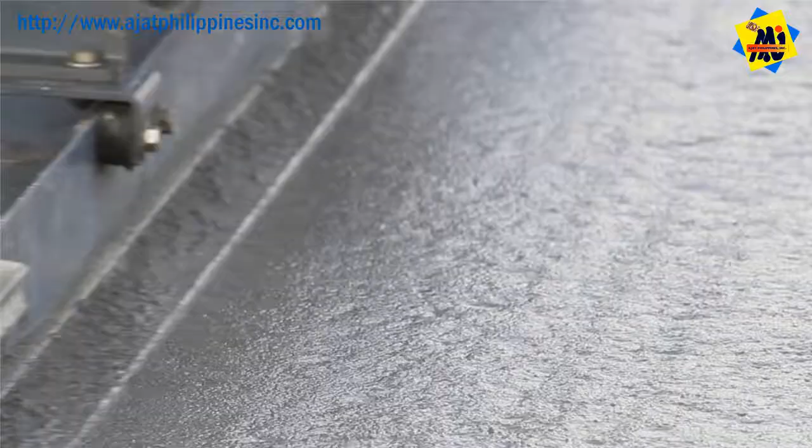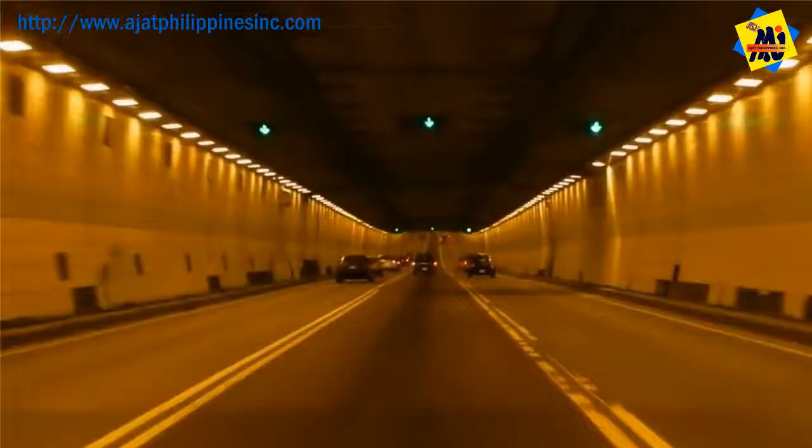Concrete is the primary building component of our developed world. With it, the human race has built buildings, cities, bridges, ports, marine walls and piers, caisson infrastructure, tunnels, sewers, dams, highways and roads, rail transport, and the very homes we all live in. Concrete is made from sand, aggregate, cement, and water.

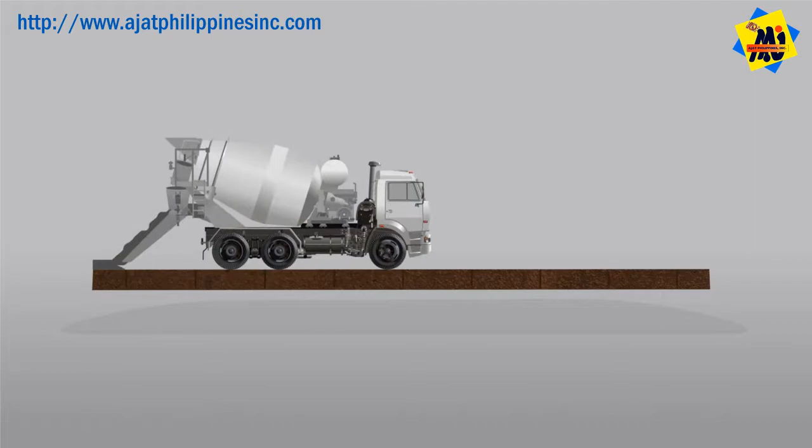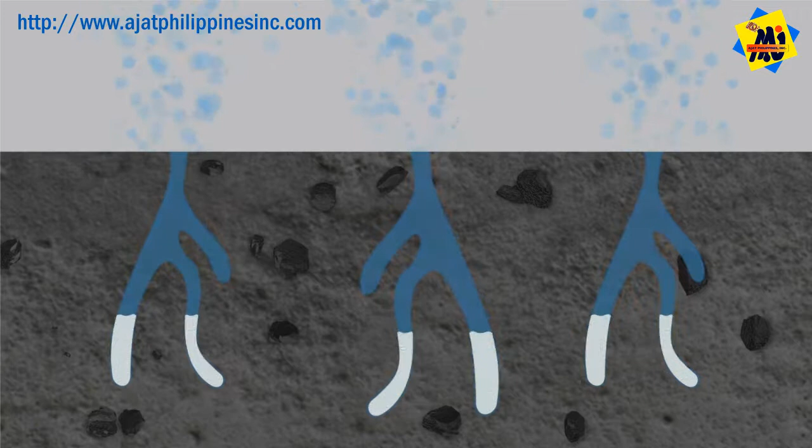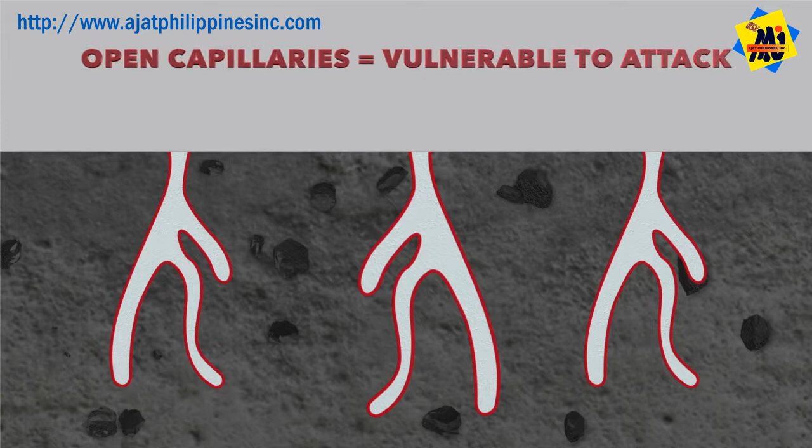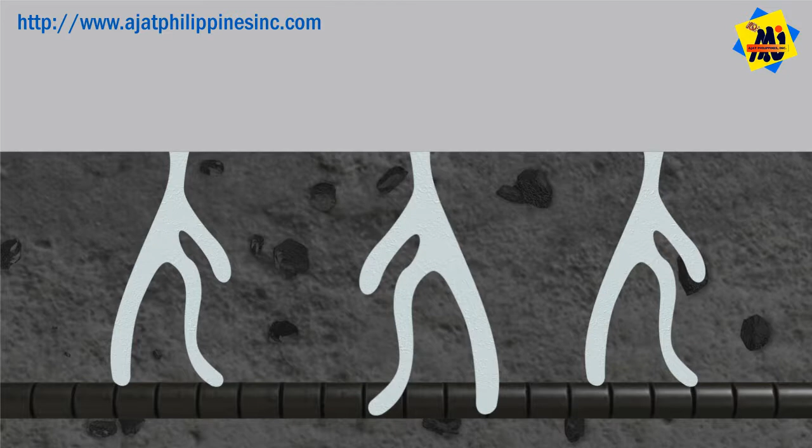When placed or cast in its mixed form, bleed water in concrete escapes into the air, creating capillaries. These microscopic arteries go deep into the concrete matrix and stay open permanently after the bleed water escapes into the air. These open capillaries instantly make concrete vulnerable and expose it to attack in many forms. The principal attack agent is moisture, which can lead to a number of problems, like corrosion of the embedded reinforcing steel. For corrosion to occur, you need three elements: steel that can rust, oxygen, and water, the last two of which get into the concrete through these open capillaries.

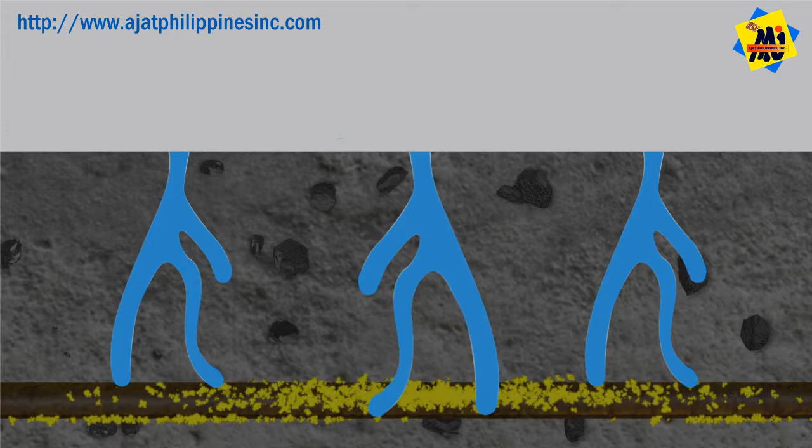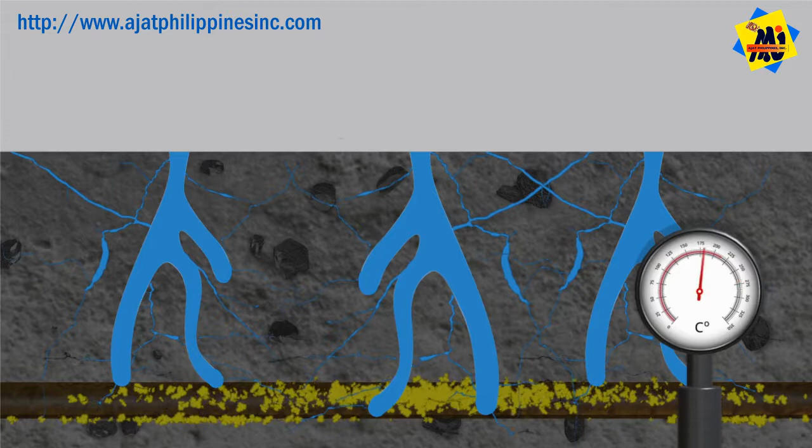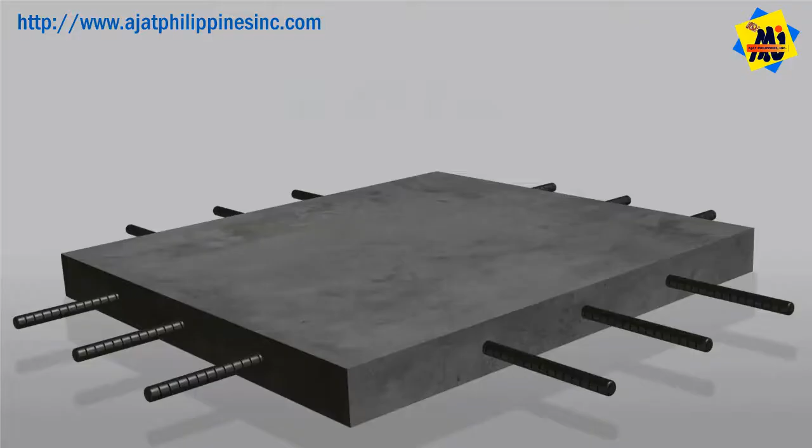Another problem is plastic shrinkage and cracking. The presence of water in the capillaries expands and contracts the concrete with temperature change, as well as curing processes that cause the concrete to crack from the surface down. Efflorescence, or salt blooms caused by the sodium chloride, rise to the surface as water and salt combine in the concrete. This destroys concrete internally like a cancer. Moisture also creates flooring problems with mold and adhesive failure, attacking resilient flooring products. Water, the very element that gives concrete its life, can also destroy it if the concrete is not protected.

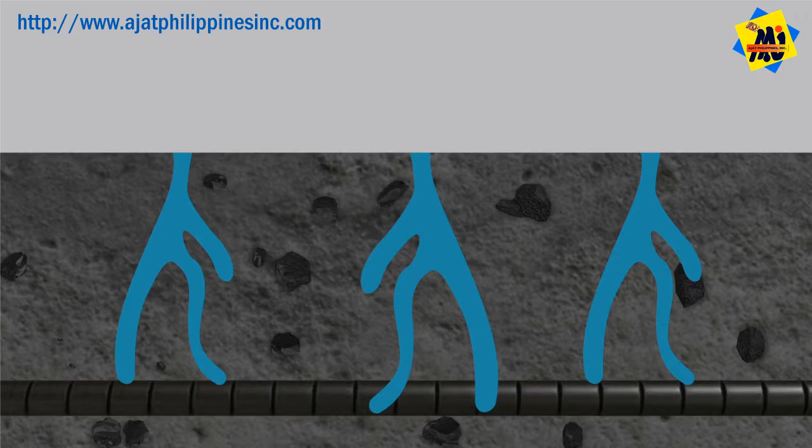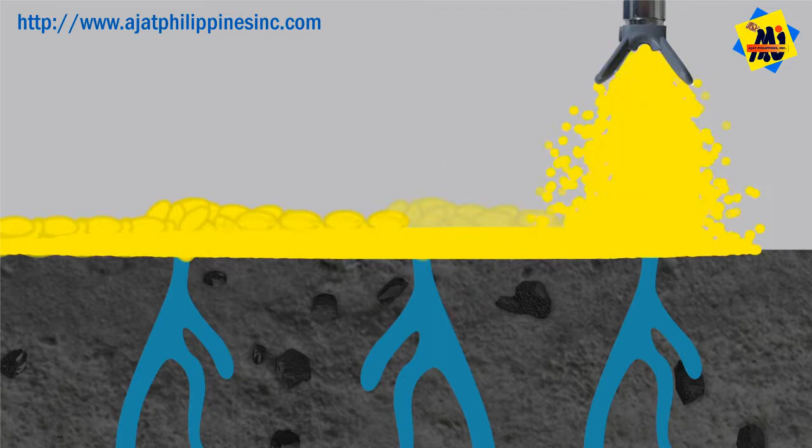Traditional attempts to solve this problem have included crack-filling compounds, surface membranes, coatings, silanes, and silicates. Unfortunately, these options are inadequate and temporary. They add additional cost over the life of the concrete, while only treating the surface, leaving the real problems to fester underneath. Ultimately, none of these methods are permanent solutions to the problem.

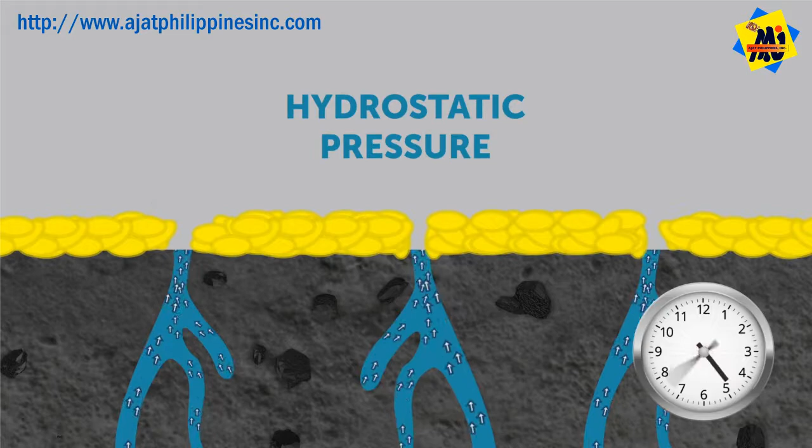There is a solution, and it's called SprayLock Concrete Protection. SprayLock penetrates deep into the entire length of each and every tiny concrete capillary, reacting with the free alkali that lines the capillaries, filling them and sealing them with an indestructible gel that lasts forever. It shields the concrete from all forms of outside attack from deep within for a lifetime. SprayLock has an amazingly unique ability to transform standard concrete into perfect, impenetrable concrete.

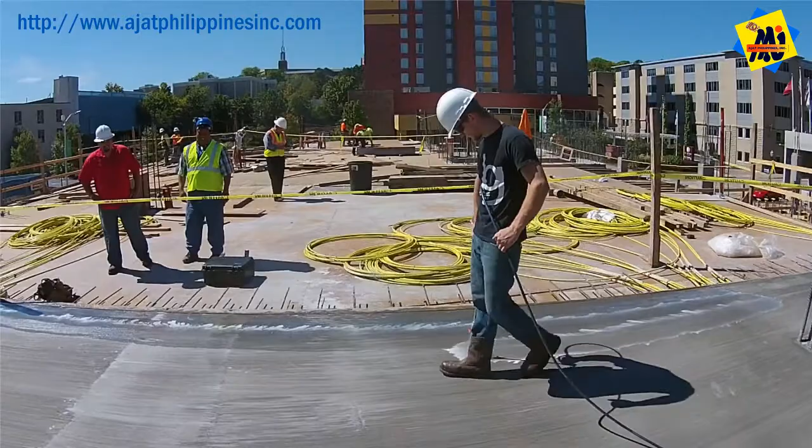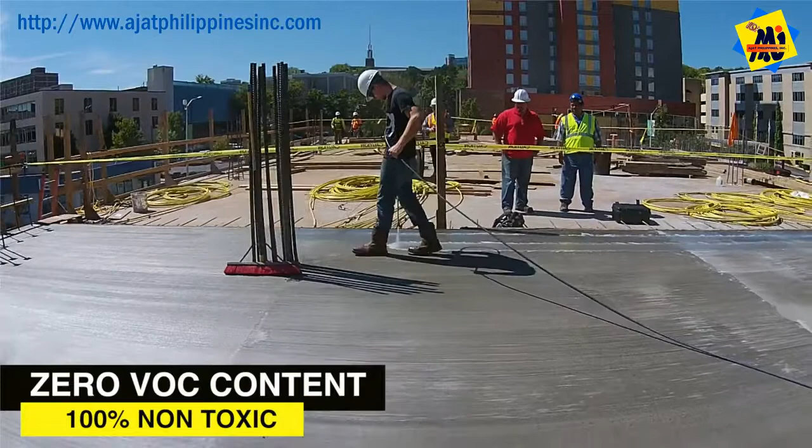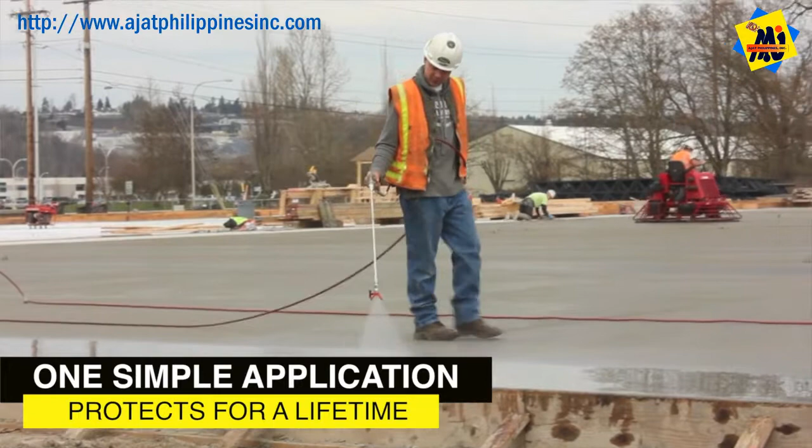And because it has no toxic components, it can be used on any concrete application, including concrete tanks used for drinking water. It contains zero volatile organic compounds. It does not harm the environment, and it is totally safe to apply. SprayLock is only required to be applied once to new or existing concrete, and protects for a lifetime. And shouldn't the things we build last for a lifetime? Incredibly, protecting concrete is not all SprayLock achieves. There are numerous benefits available from a single application to newly poured or old existing concrete of any age.

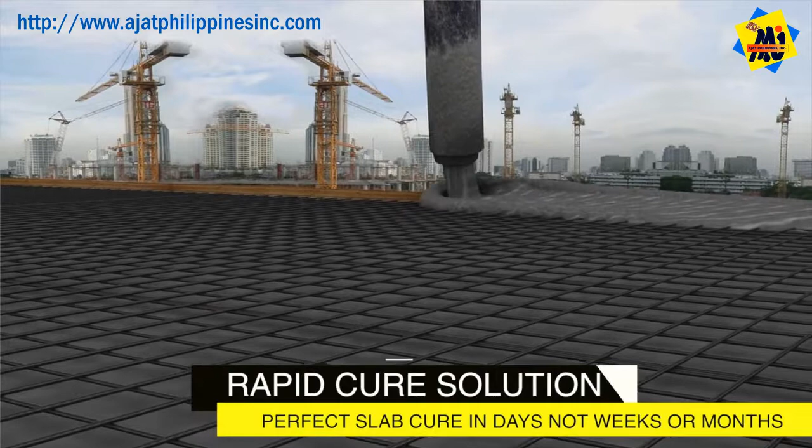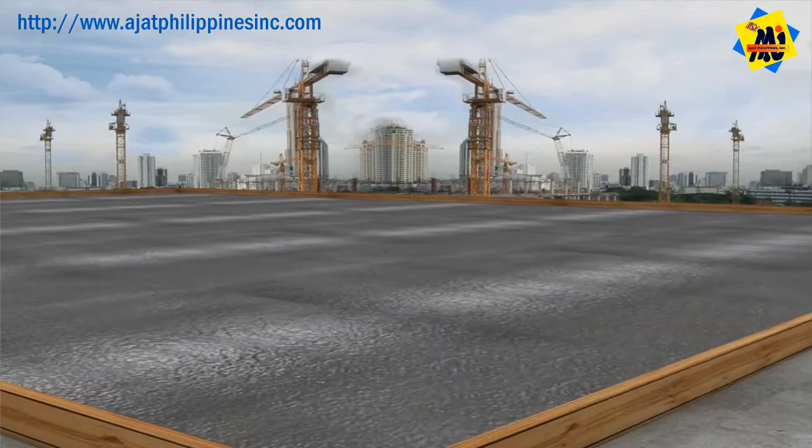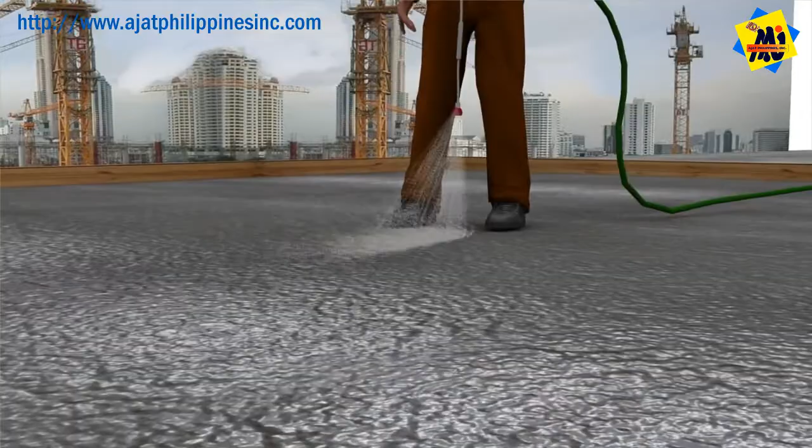When used at time of concrete pour, SprayLock speeds effective curing time into days, not weeks or months. This time-saving benefit accelerates construction time, saving huge amounts of money to every project. Because we all know that time is money. Floor layers from across the globe have laid new flooring onto newly laid concrete treated with SprayLock in as little as 14 days after pour, which would normally have taken weeks or months for the concrete to be ready for flooring installation.

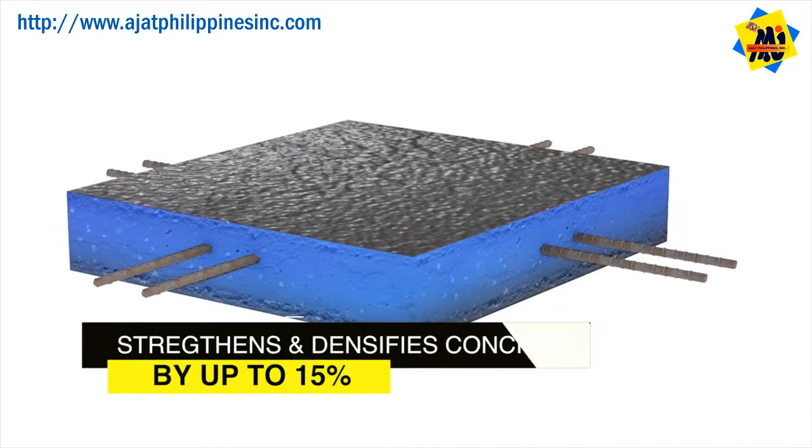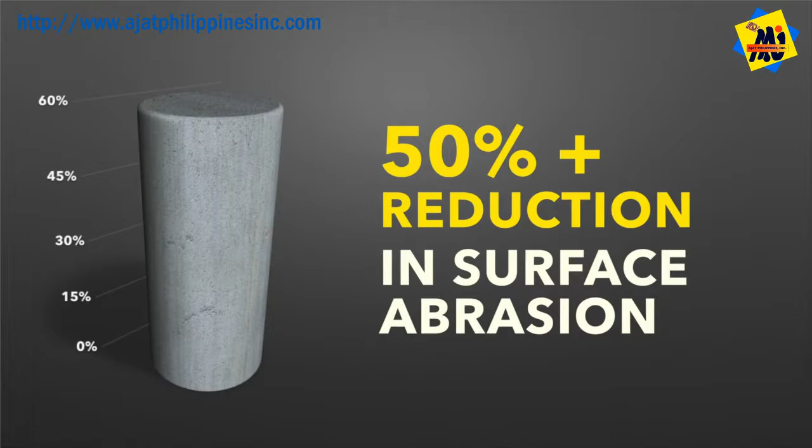SprayLock also is uniquely able to strengthen and densify the concrete as it accelerates the calcium silicate hydrate reaction that takes place within the capillary spaces in the concrete. It changes the normal calcium silicate hydrate reaction gel into a stronger compound within the pore spaces. Adding SprayLock into the concrete capillaries can strengthen and densify concrete by up to 15%. By filling, rather than just blocking the capillaries, it also hardens the surface paste, making it resistant to abrasion. Independent tests of SprayLock show a reduction in surface abrasion of concrete surfaces by over 50%.

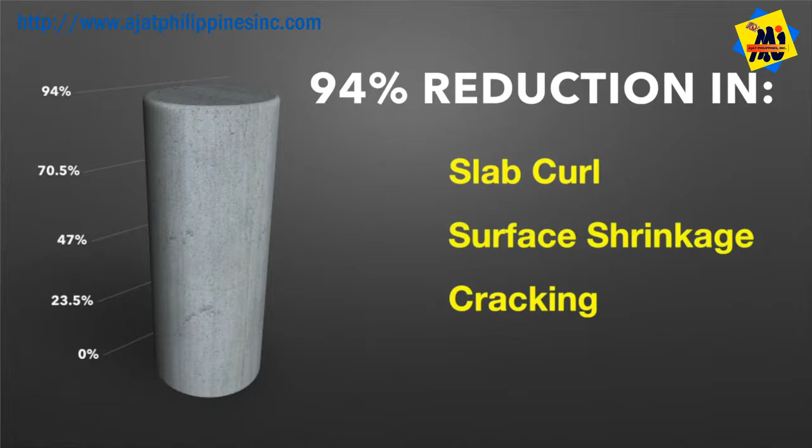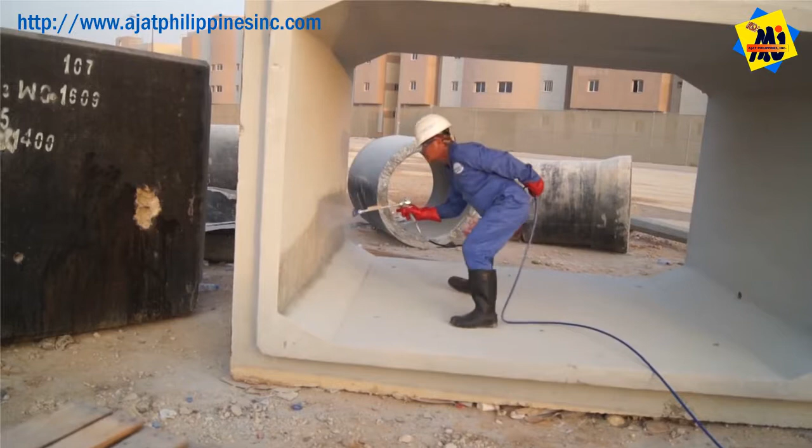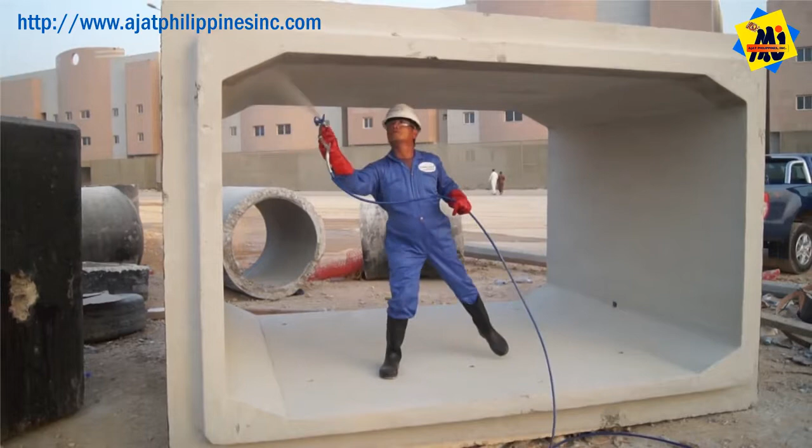Carbonation penetration is also reduced by up to 97% on SCP-treated concrete. Through the rapid expulsion of bleed water on new concrete slabs, SprayLock reduces slab curl and surface shrinkage and cracking by up to 94%. Freeze-thaw cracking can now be virtually eliminated. All forms of Portland cement concrete can be treated by a single spray application in horizontal, vertical, or overhead concrete surfaces. One spray application from the negative or inside surface can ensure that underground tunnels, walls, tanks, and pipelines can be treated to prevent moisture damage to concrete.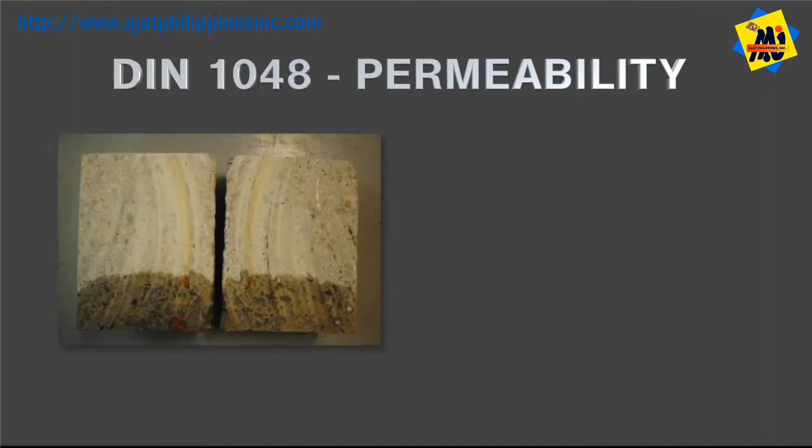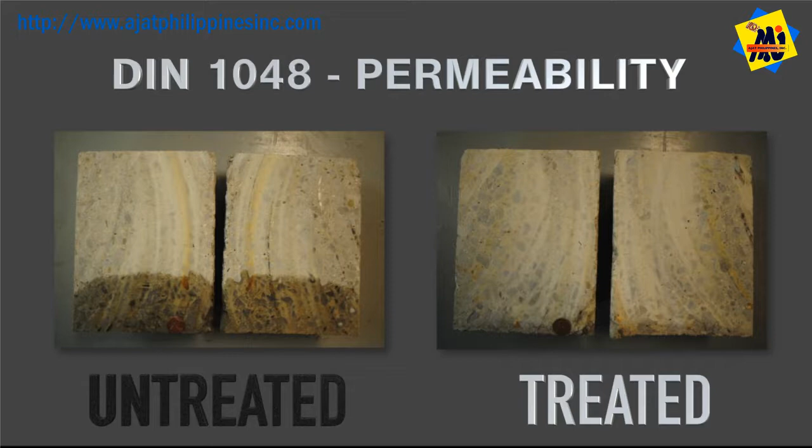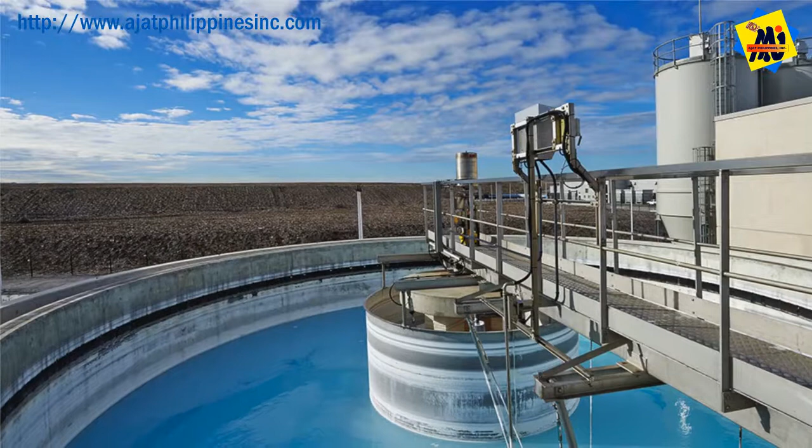SprayLock has been used on walls where up to 100 meters of head pressure water exists on the opposite side. This internationally accepted test puts concrete under high pressure over 3 days to test resistance to water intrusion. SprayLock is added to the sample on the right, and you can see the very limited penetration by the size of the penny on it. SprayLock also provides complete protection from salt attack in marine environments, as the salt can no longer penetrate into the capillaries. This includes the residual sodium chloride from desalinated seawater that can destroy drinking water storage tanks.

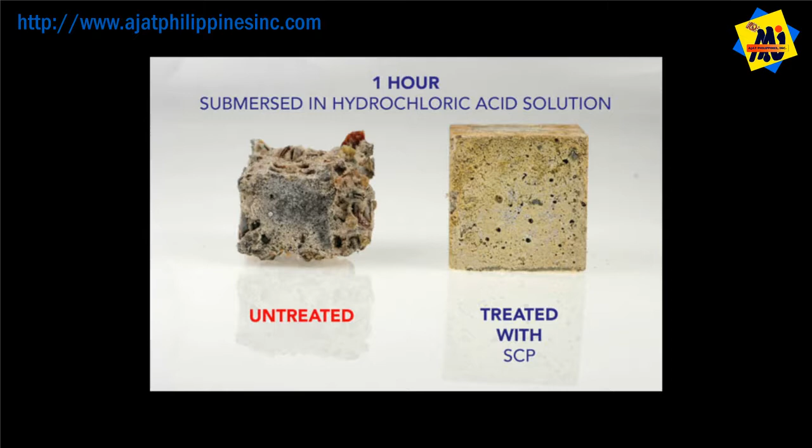In relation to acid protection, these pictures show two identical concrete sample blocks. One treated with SprayLock, the other untreated. Both were submersed in a strong and torturous hydrochloric acid solution. These are the results after 1 hour. These are the results after 2 hours. The results speak for themselves. With SprayLock protection, concrete infrastructure can last for a lifetime, with an increased strength and durability that untreated concrete cannot come close to matching.

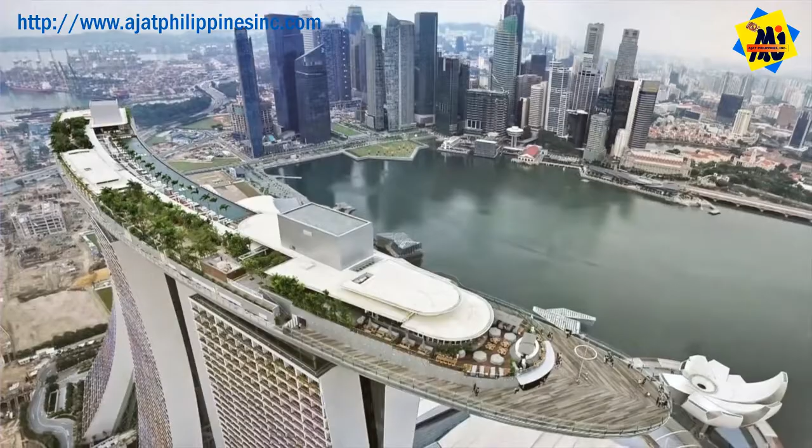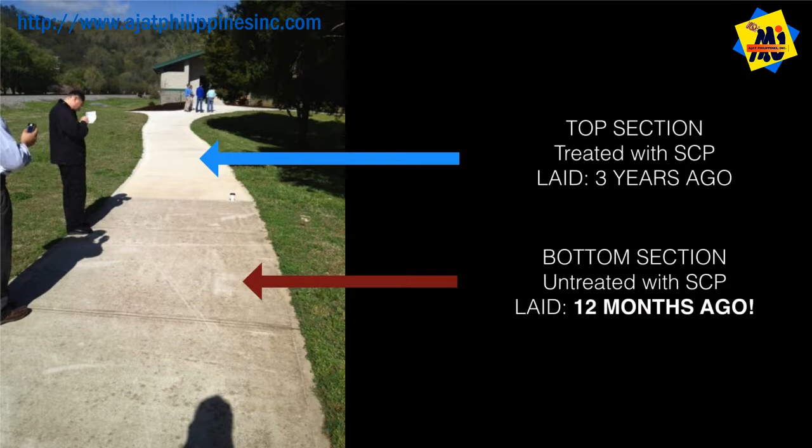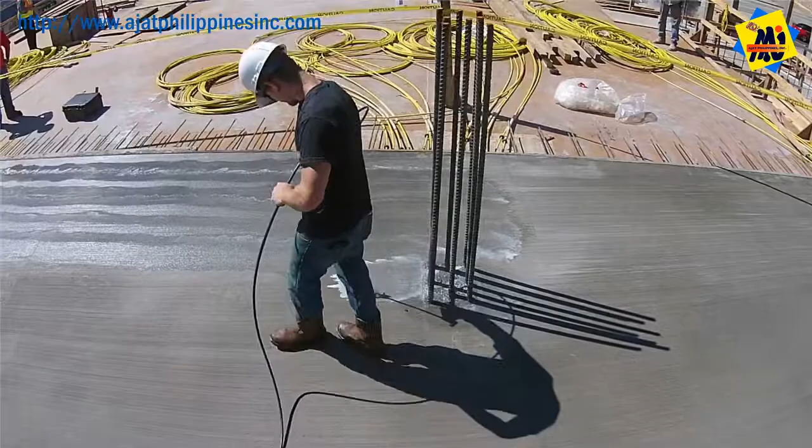SprayLock has been used for 30 years without one failure. We also proudly offer the longest warranty of concrete anywhere in the industry. Concrete has been with us since the Roman Empire, yet we have huge companies producing temporary, single-purpose patch-up products to address concrete protection, because all of them have failed to invent technology that integrates into the concrete to provide permanent protection with just one application. We took on the problem and solved it from the inside out. Why not prevent tomorrow's problems today? Our vision is inspired by the spirit of invention, that concrete should be perfect. With our unique solution, it now can be. All concrete is created equal, equally vulnerable, until now.